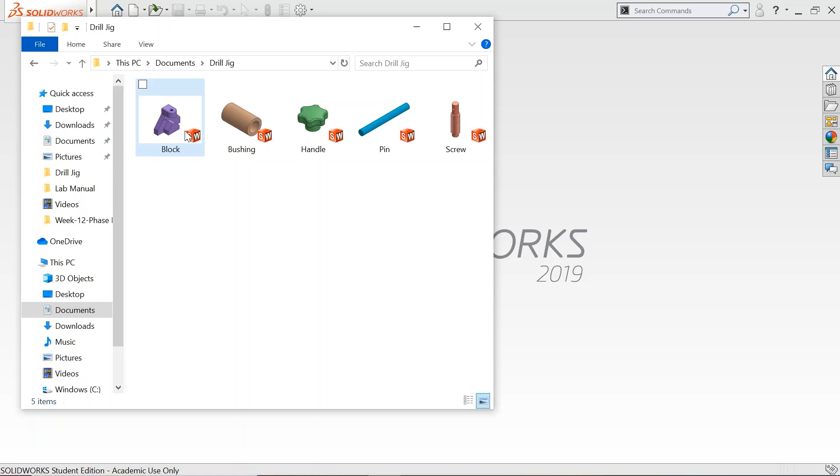In this video, we look at the assembly of drill jig parts. The modeling of the parts was shown in the previous video. The first part was the block. The second is the handle.

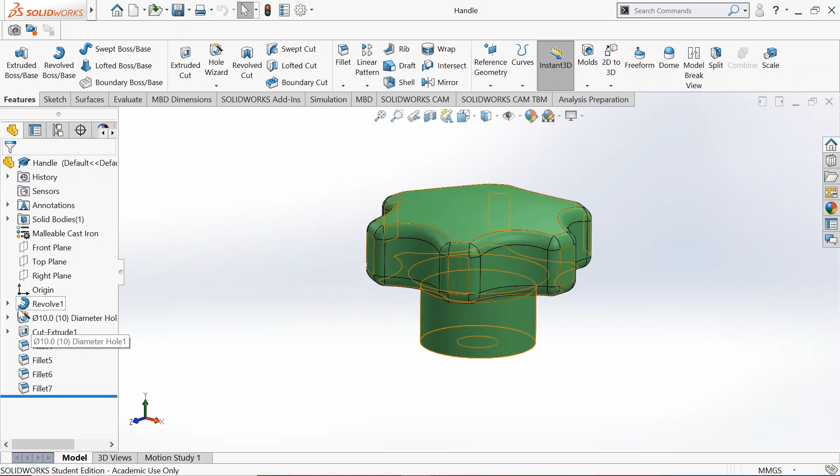We missed a feature in this in our last video, a hole drilled through. So let's complete that. It has a circular profile as seen from the front, making the front plane the sketch plane. Going normal to it and sketching a circle, the center of which has a vertical relation with the origin.

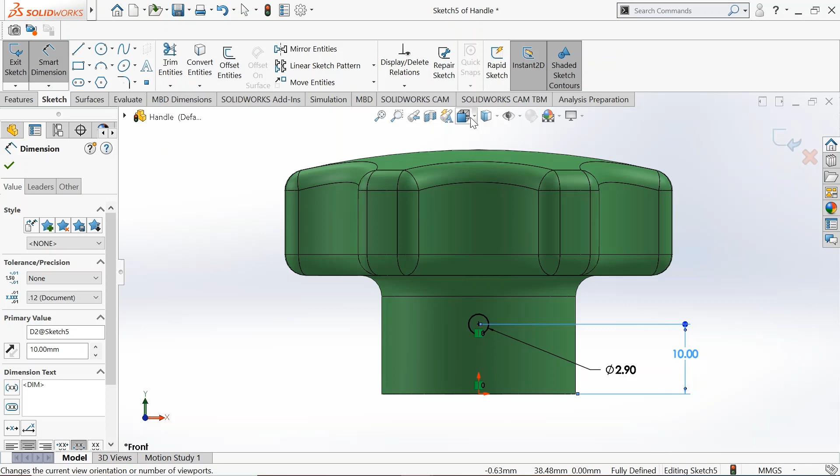This has a diameter of 2.9 and is positioned at a height of 10 mm from the bottom edge. Let us cut extrude on both sides to generate a through-all hole on either side of the handle.

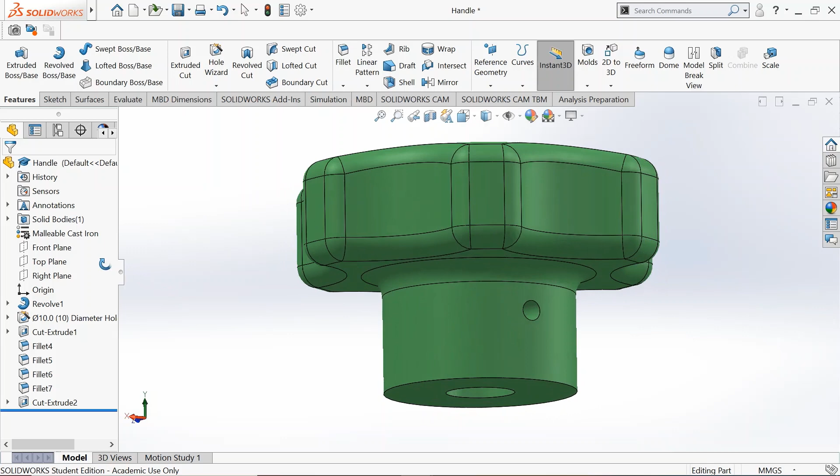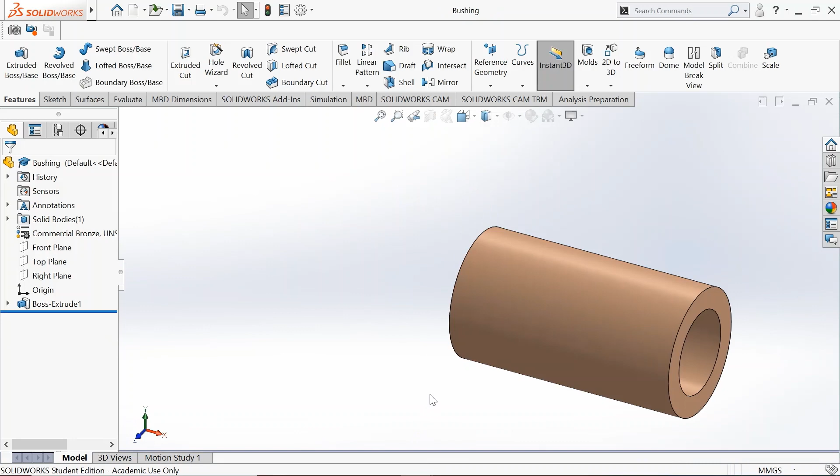We have the third part as the screw. The fourth one being the bushing. And finally the pin as the fifth part. To make an assembly, we create a new document using the new file option under the standard toolbar. Select the assembly file.

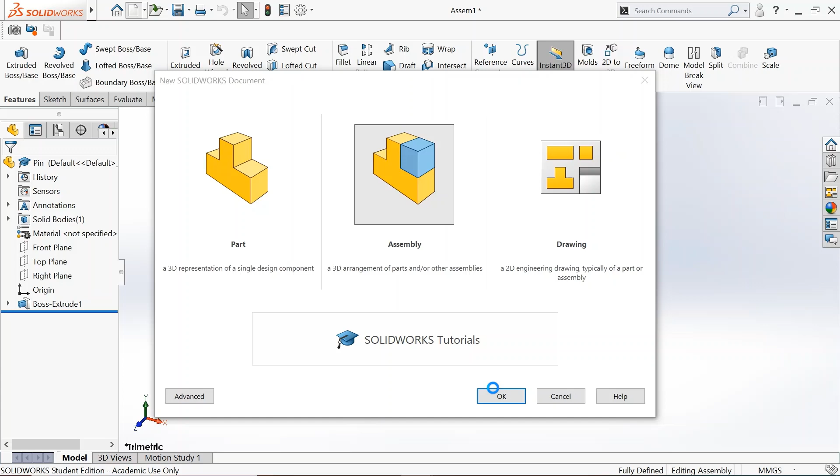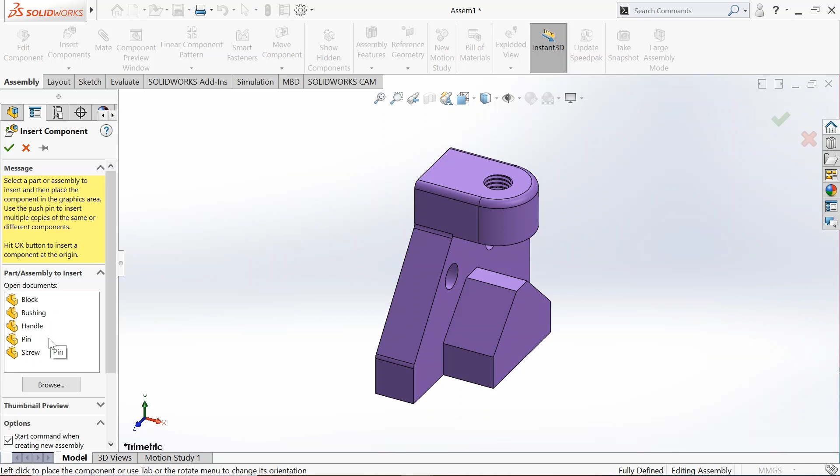We have the following documents open, which are listed here in the property manager. We select the block as the first part to be included in the assembly. We get in the second part using insert components under the assembly toolbar. Select the screw and place it at the top of the block. Click on insert component to get the handle in here.

We repeat this to get the pin and the bushing. There are two of these bushings, so you can get another one of the same part.

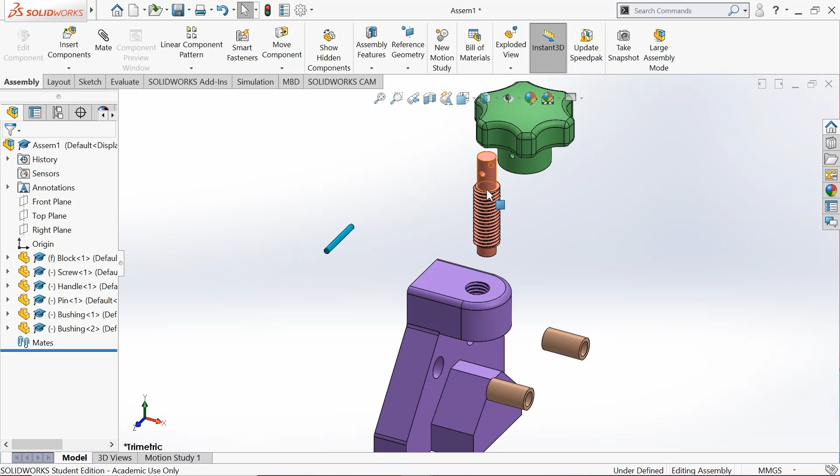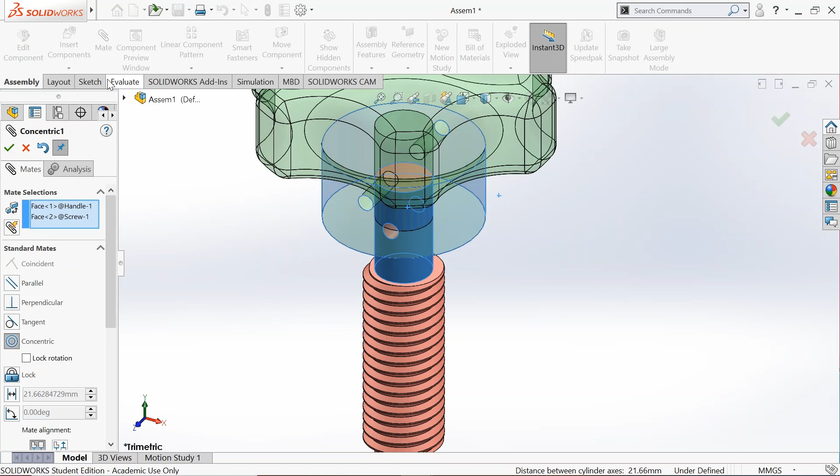To add the mates, we'll try to assemble the handle, screw and the pin, and then the three together into the block. We have a concentric mate between the cylindrical faces of the handle and the screw. Select the two surfaces. Under mate, assign a concentric mate.

Move the screw a little bit down to have a look at the inside surface of the drilled hole with diameter 3 and 2.9 in the handle. With those two selected, assign a relation of concentricity again.

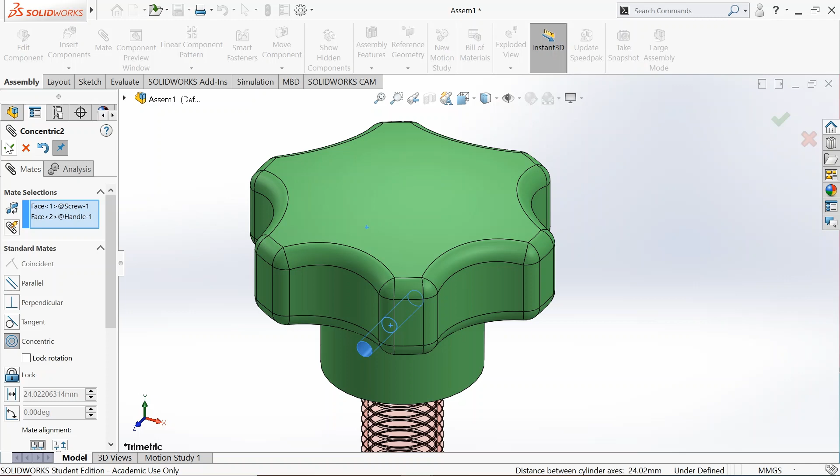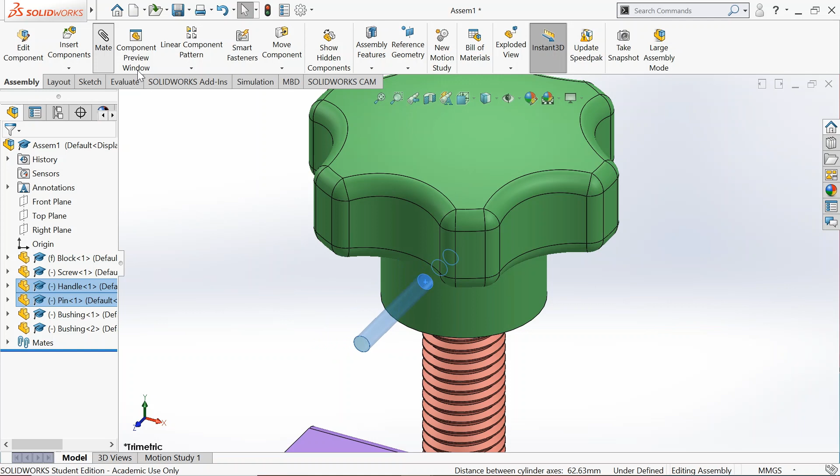The pin needs to pass through both of these two components. Select the outside surface of the pin and the inside surface of the hole drilled in the handle. Assign it a mate of concentricity. The flat end of the pin can be assigned a tangent relation to the curved surface on the cylinder. This is already tangent.

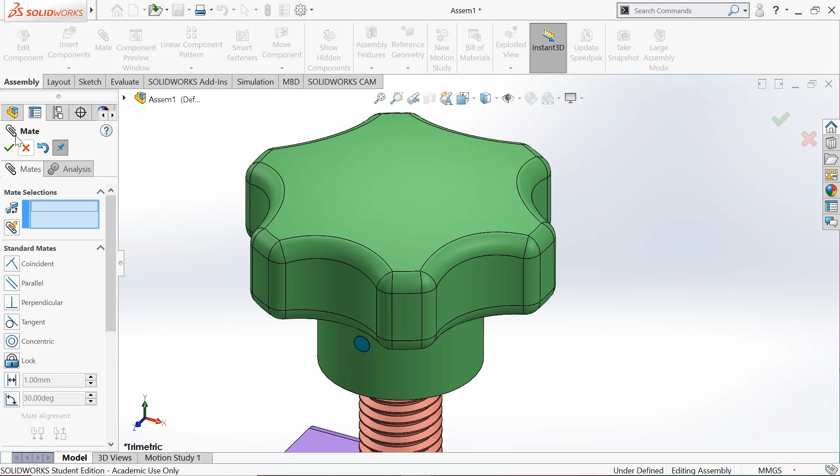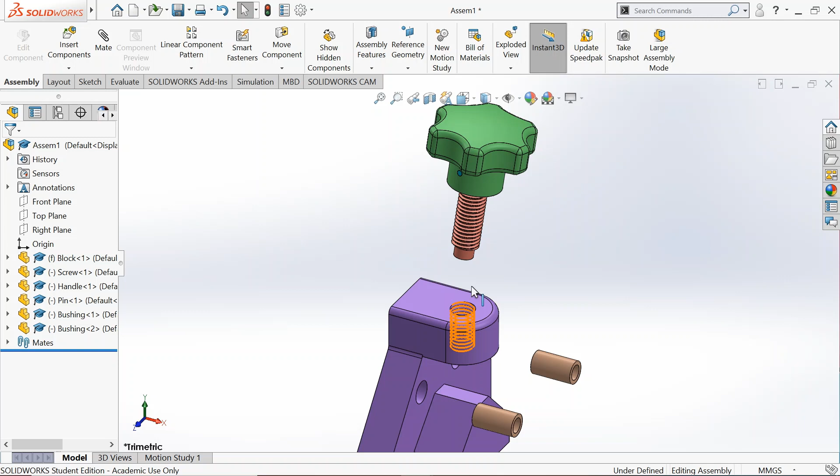Click on move component and try to move the three together. Okay, they revolve together. Then comes a screw mate between these two features here in the block and the screw. Before that, we assign a concentric mate between the cylindrical features.

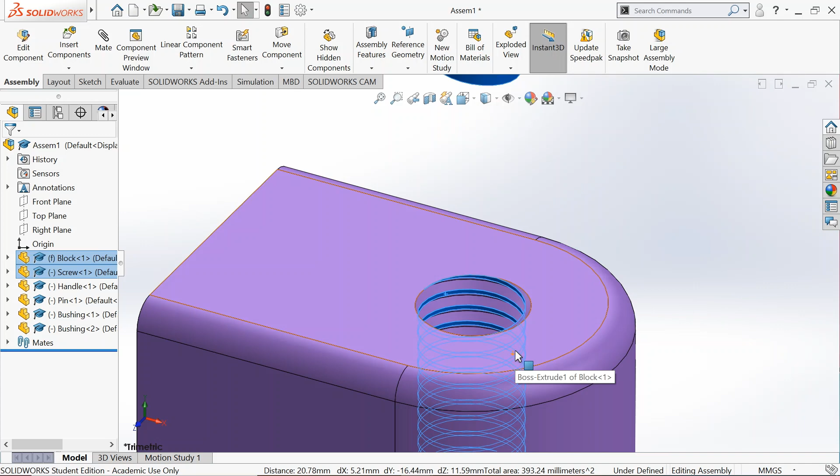So we have the boss at the bottom here, and we can pick up the surface coming from the minor diameter of the threaded hole, or you could also pick up the curved surface on the outer side here. Both of these are concentric, so it could apply to the feature above as well, where you can have a concentric mate between those curved surfaces.

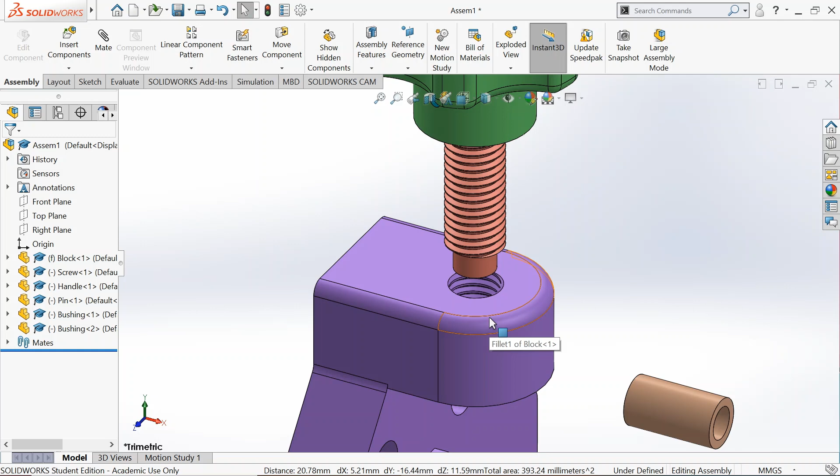Now the vertical movement between the screw and the block would be possible only if you rotate the handle. This is because of the screw having a threaded feature. So in this case, we make use of a mechanical mate. Under mates, open up the tab for mechanical mates and then select screw mate. Make the selection as the axis of the screw and the axis of the threaded hole in the block. Turn on the temporary axis.

Once you make them visible, assign the axis of the block and the axis of the screw to have a screw mate between the two. You have the direction of rotation here. This is a clockwise direction. This is a right-handed screw, so we have it moving down or advancing into the nut when turned in the clockwise direction. The distance that it travels per revolution, we'll consider this to be 2 millimeters, as we have this as a single start thread with a pitch value of 2. So the lead here will be 2 millimeters.

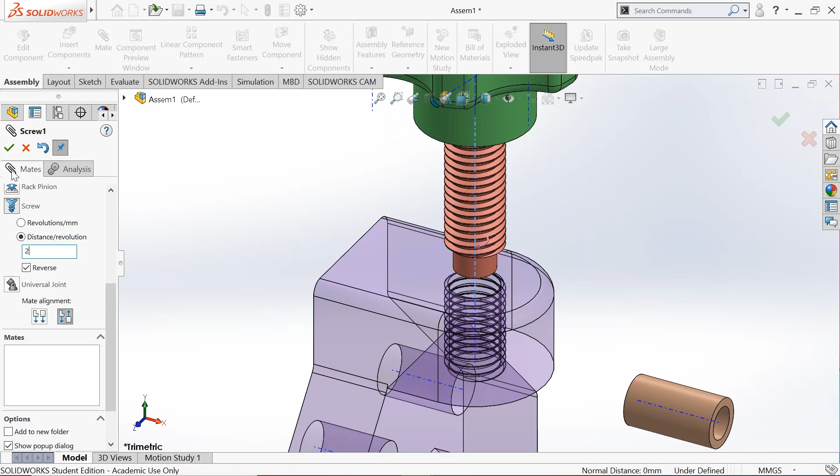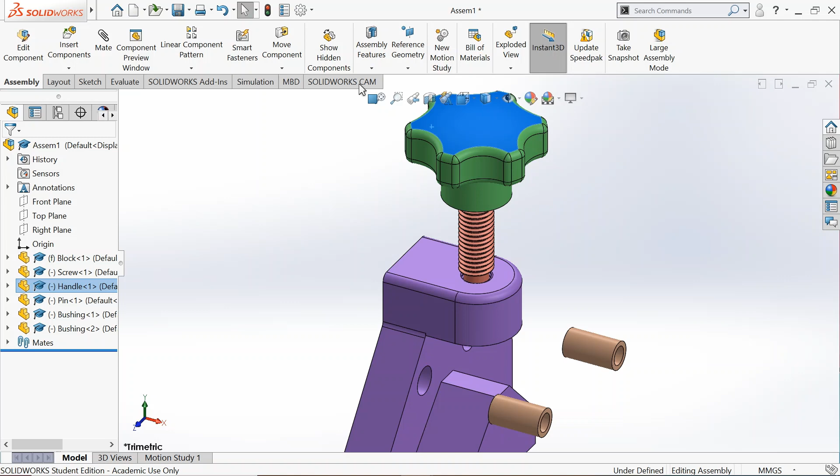Now you can hold the top of the handle and try to rotate this. Let's turn off the temporary axis before we turn the part. Hold the part from the handle on the top, rotate it to observe the movement downward into the block coming from the screw mate. Now the handle goes down and at the most can strike the surface, it cannot go further below that, and the bottom of the screw

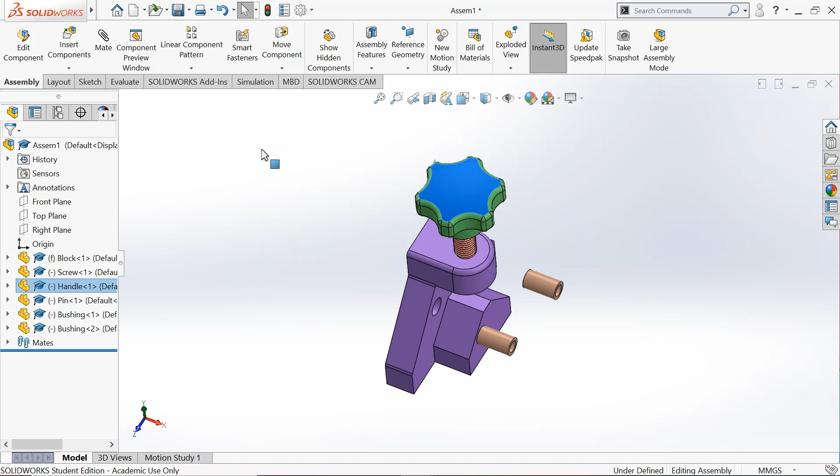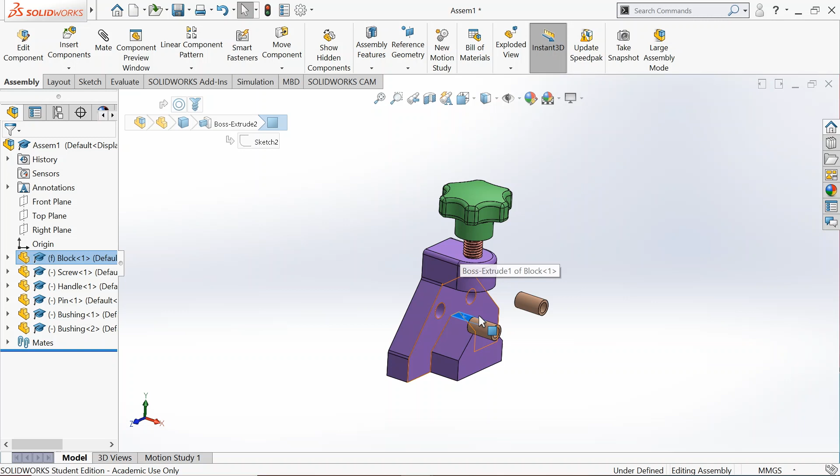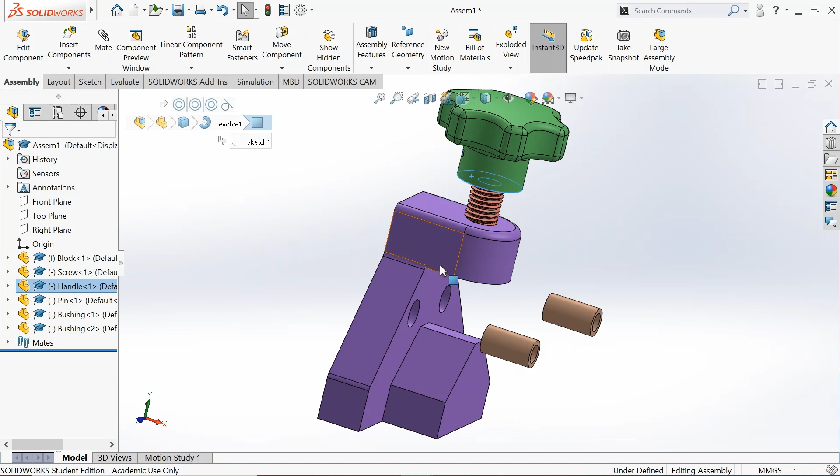The bottom of the screw and the top of the anvil here on the block do not strike each other because of the constraint that we have on the top. So we can assign a distance mate between the bottom of the screw, this face, and the top face on the block. So these would be the two faces between which you can assign the distance mate, or it could be between this face and the bottom of the handle. So pick either of these two and then give a distance mate.

I select this face here at the bottom, and the other face on the top. These are the two working surfaces on which the object would be clamped. We give this as a distance mate, and that too as an advanced distance mate with a limit.

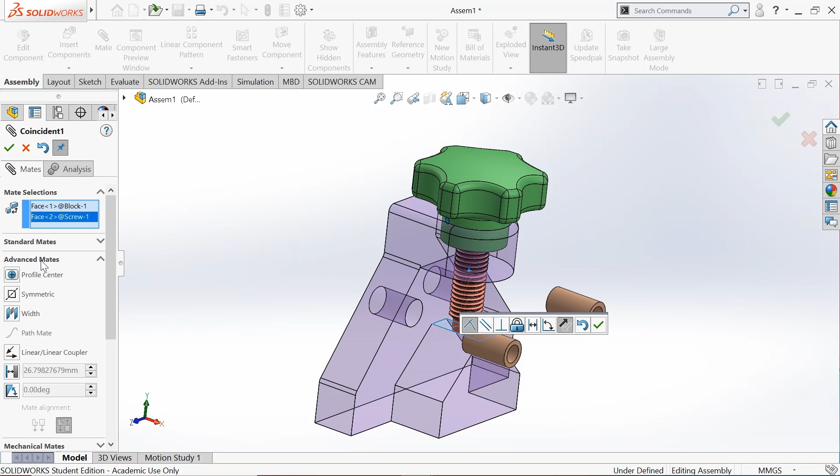Under advanced mates, assign the distance here. We assign the distance between the two flat faces, the bottom of the screw and the top of the block, extended portion of the block here, as the distance 88 minus 22 minus 38. So the remaining distance between here is 28. That's the maximum possible distance between these two faces, and the minimum would be when

this handle is completely rotated and comes down to rest on the top of the block. In this case, you'll have the entire length of the screw inside the block here. So this is 38, and the remaining portion would be hanging down. So you have 58 as the length of the screw.

You subtract 18, which would be moving into the handle. So the leftover portion is 40, and you have 38 as the other height. So if you subtract this from 88, you'll be left with 10 as the minimum gap between the two faces.

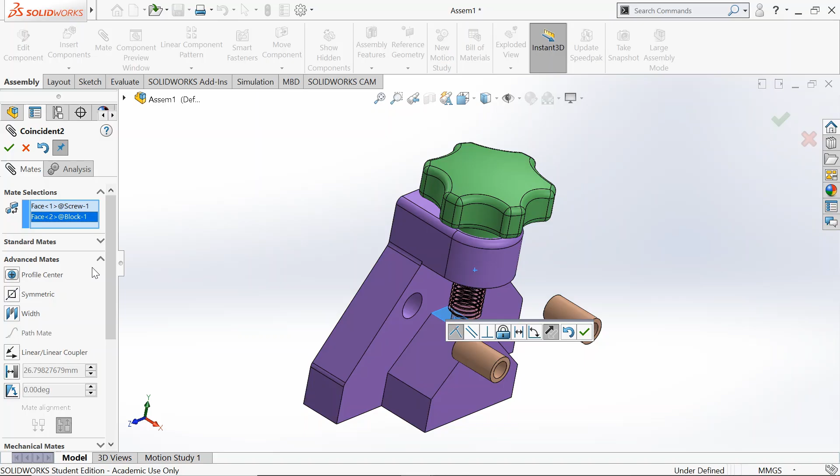So we'll assign these two limits, a minimum value of 10 and a maximum value of 28, between these two faces. We select distance, and set the maximum distance as 28 and a minimum of 10 millimeter between the selected faces, and accept this.

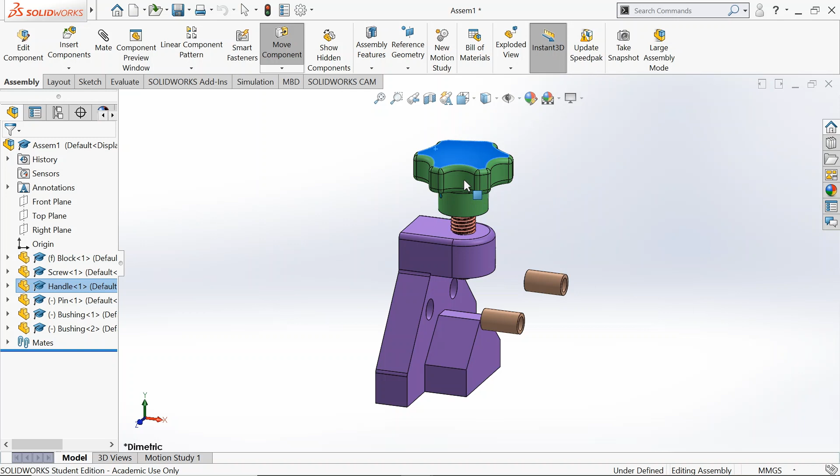Going over the dimetric view, try to hold the top of the handle and rotate this until it goes down completely, striking the block. It has reached the

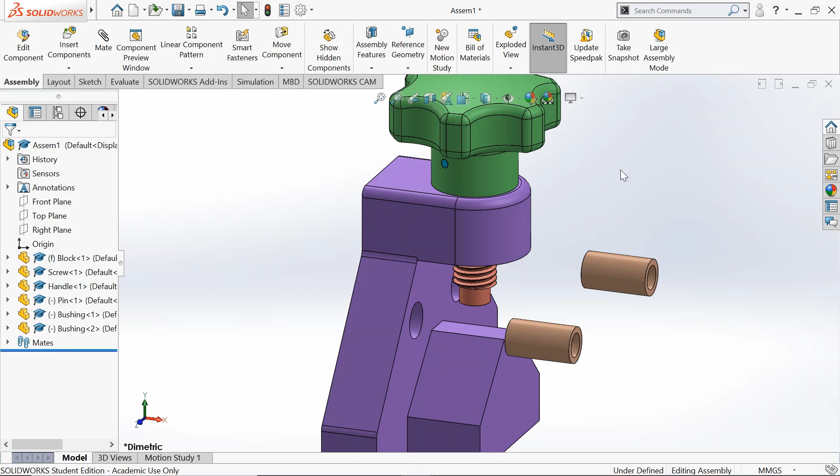limit of a minimum gap of 10 between the two faces. As you try to rotate, it does not go down further and has got constrained there. In the same manner, as you keep rotating this in the counterclockwise direction, it will come out but doesn't move out completely. When there's a maximum distance of 28 between the two surfaces, that stops there.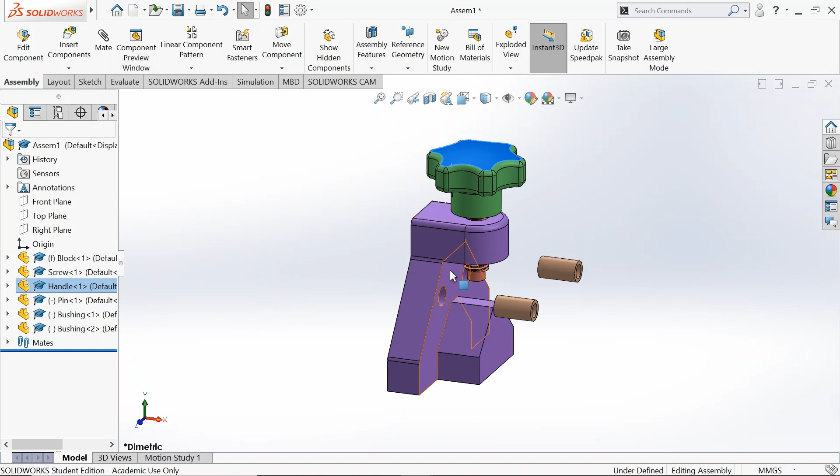It can come out completely, but for simplicity's sake, we try to restrict the movement in the opening direction. We then have the bushings to be included into the assembly as they go into the block. We have the two surfaces here.

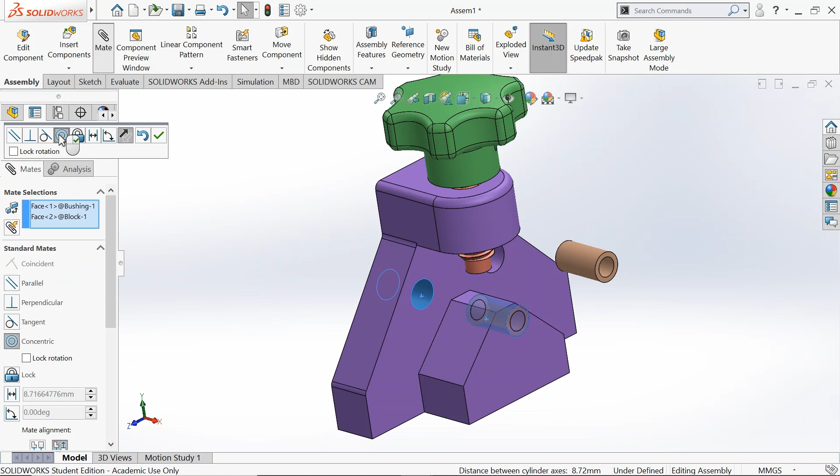Assign a concentric mate between the selected faces. The flat end of the bushing and the frontal face here on the block are coincident to each other. Similar mates are to come onto the other bushing.

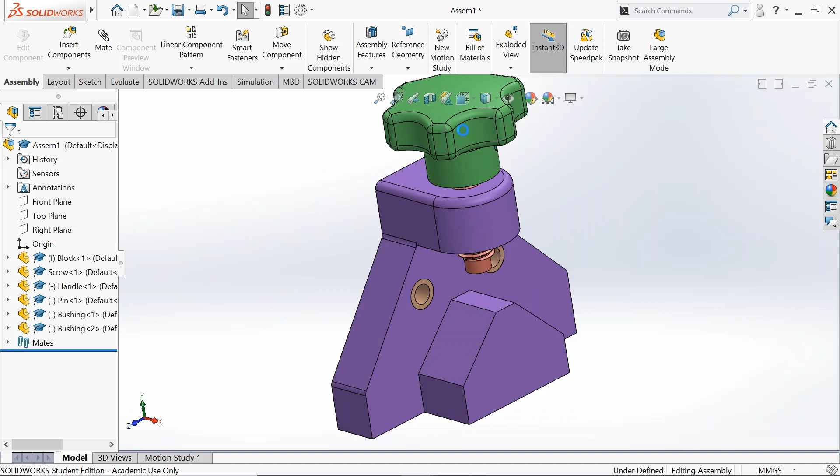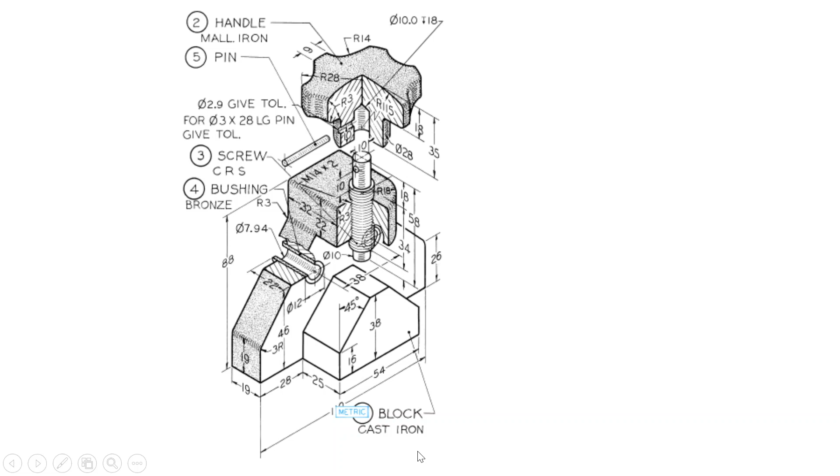Appropriate tolerances need to be assigned on the pin and the hole in the handle. We have the hole size as 2.9 and the pin as 3. Locational interference will be considered between the pin and the handle, with the fit symbol of P7/h6, considering a shaft basis system between the handle and the pin.

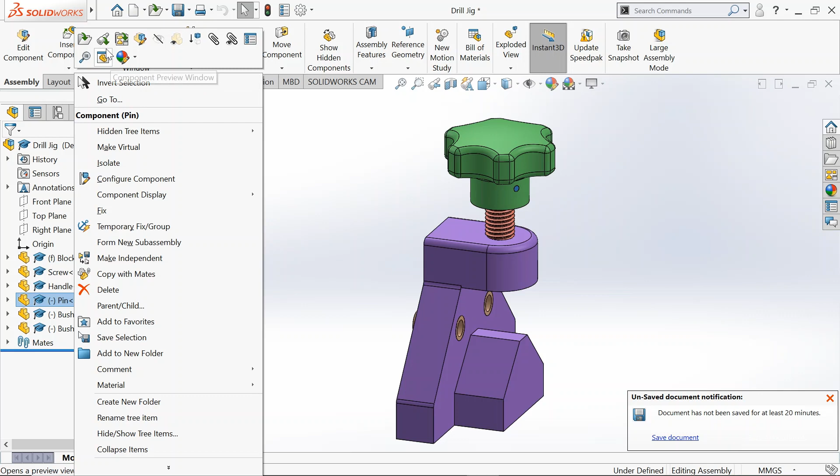Let us add the tolerances on the pin and the hole on the handle. We edit the pin and change the dimension 3 to have a fit with tolerance, with the shaft fit as h6.

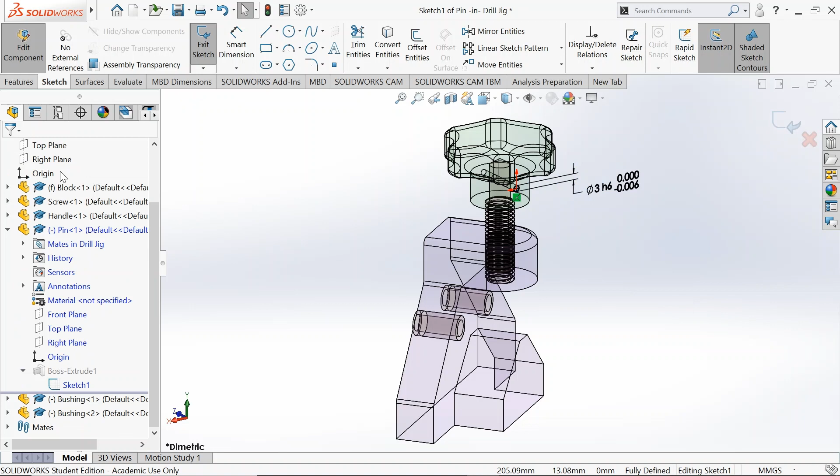Make it up to 3 decimal places, and then rebuild. Exit the part. We also add tolerance on the hole in the handle.

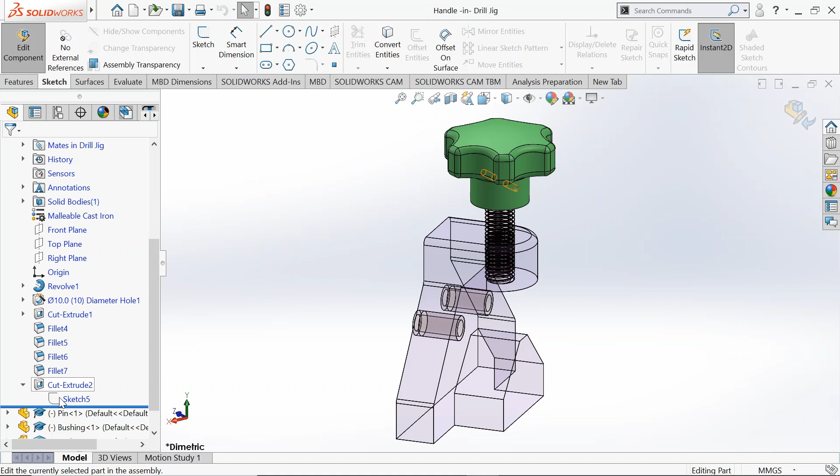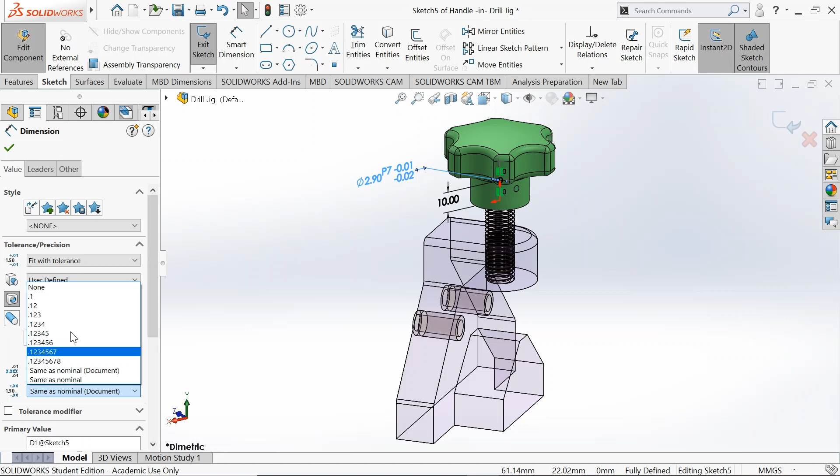Edit the part for the handle. In the sketch for the circular hole, edit the sketch to add a tolerance onto the dimension 2.9. Exit the edit part.

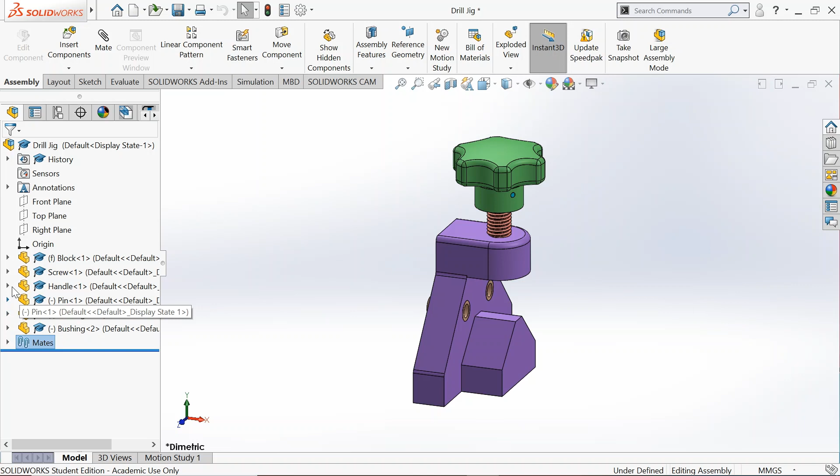Make necessary changes to the thread feature on the screw and the hole in the block to have the thread properly fit into the groove of the thread in the nut. This can be done by opening up the thread feature on the screw and assigning an appropriate offset. So let's make it a 2-view window.

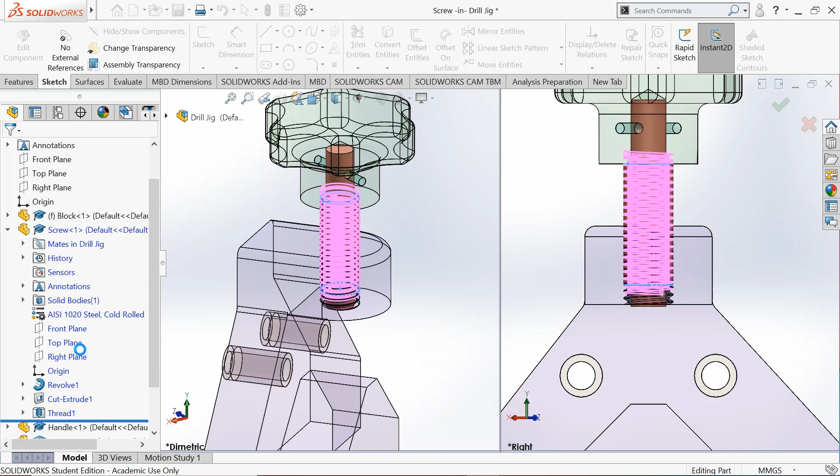We give the offset by 2.75 millimeter and 270 as the offset angle for the screw. Let's make the thread form visible. So you have it in here, the same as can be seen in the dimetric view over here.

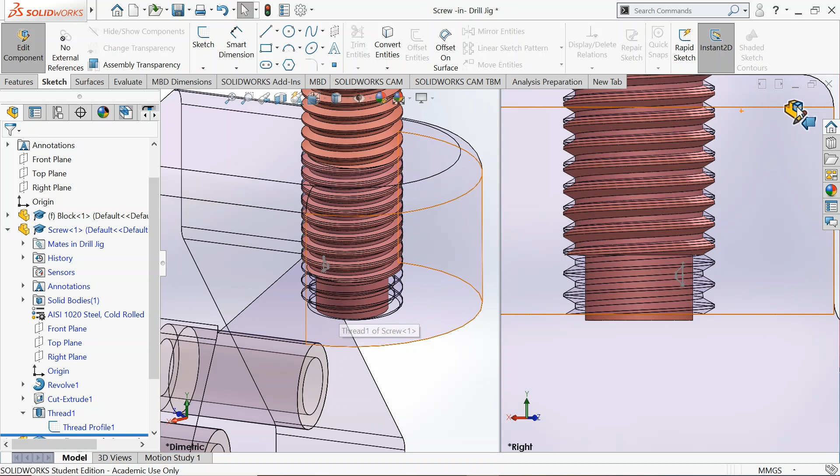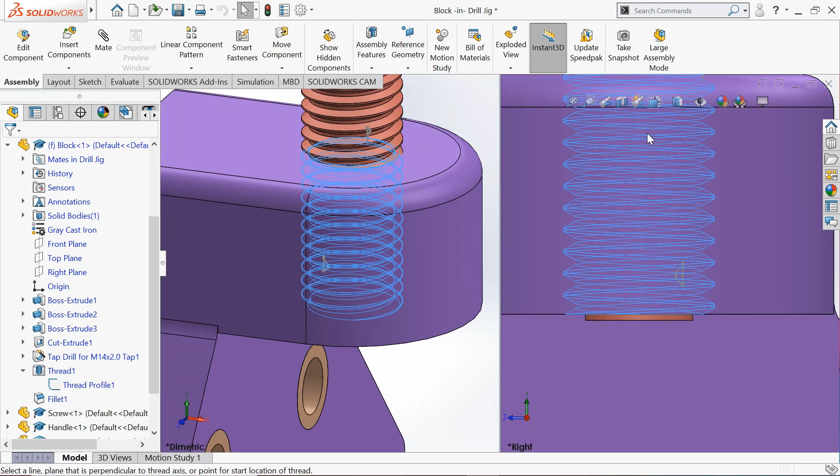In a similar manner, update the details for the thread on the block. Let's make the thread profile visible. We have got the other one here. This is having an offset of 1.5 millimeter, 90 degree. So it starts in from here, and the same thread profile is shown in the other window.

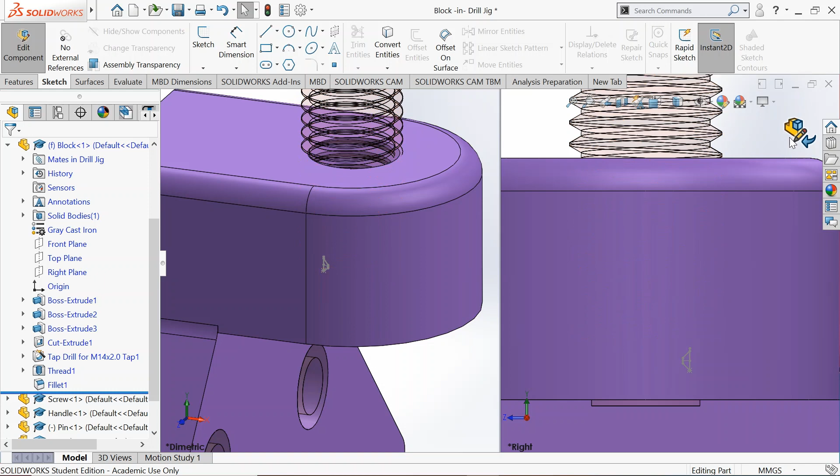By doing so, let's make this transparent. By doing so, we make sure that as we rotate the handle, we have the screw moving into the groove here. Let's try to change these values here.

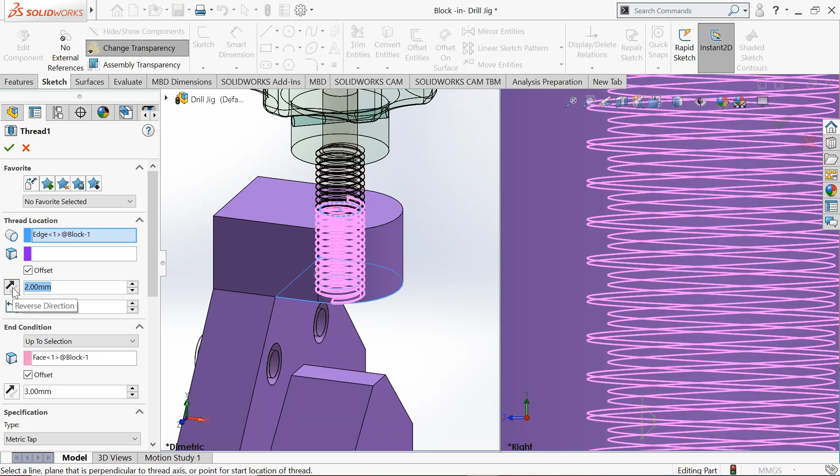So now you can observe that a value of 3 was appropriate. You can just look at the number which is appropriate to align the helical grooves that you have in there with the ridge coming on the screw.

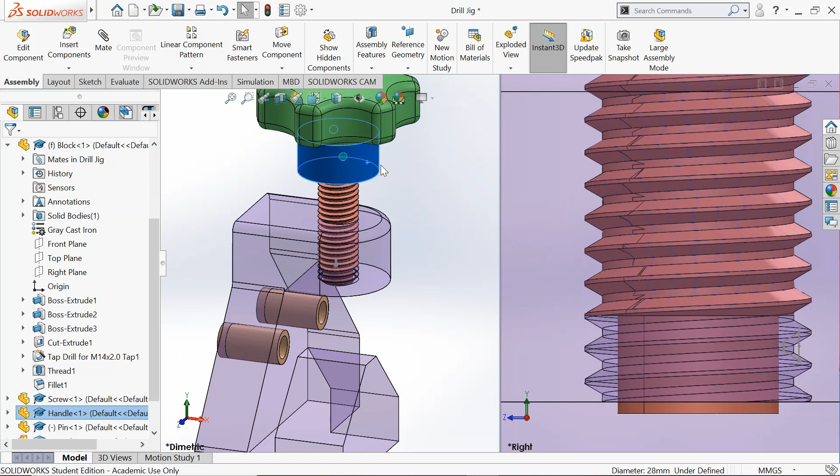Now as you rotate the handle, you will find the thread to move into the groove that's made in the nut. We hold it here. Okay, this completes the 3D assembly.